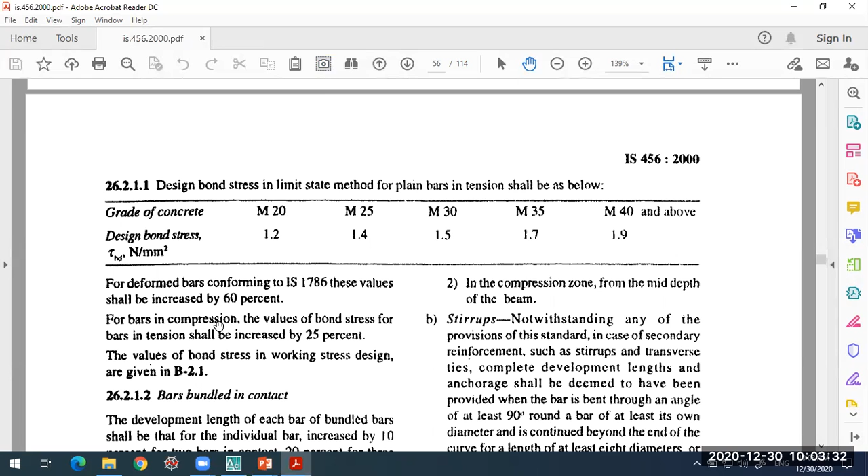Okay, if all the bars are in compression, you can increase this bond stress by 25% in addition. So 60% for deformed bars and another 25% if the bars are in compression. So that is how you are going to obtain the development length.

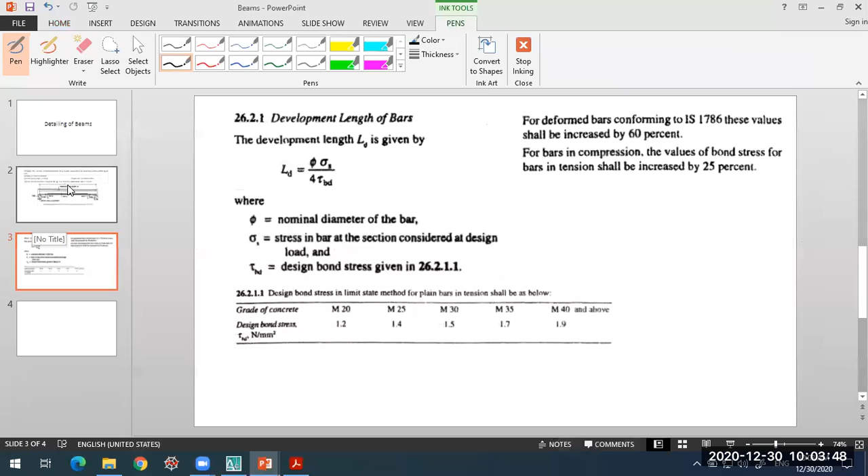So in our case, what is given here for our problem? We'll look at this problem. The span is 5 meter, and the size of the beam is told to us. Width of support, we'll take it equal to the width of the beam, that is 230 mm. So the center to center distance between the supports comes out to be 5 meter plus 0.23 by 2 plus 0.23 by 2, half the width of the support on either side. So totally the center to center distance comes out to be 5.23 meters.

So this is what I can write here, the data we are having. If I take this problem, first is the given data. Clear span is 5 meters. Center to center distance between the supports will come out to be 0.23 by 2, half the width of the support on the left side, plus the clear span, plus half the width of the support on the right side. So this is the L value we have, 5.23 meters.

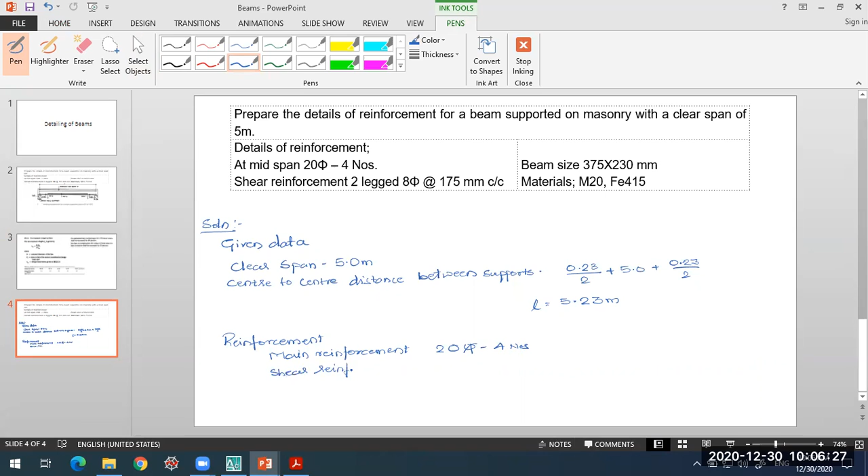And what else is there? The main reinforcement, that is the reinforcement at the bottom. So main reinforcement, we have it as 20 mm diameter bars, 4 numbers. Then shear reinforcement, they are two-legged stirrups, two-legged vertical stirrups.

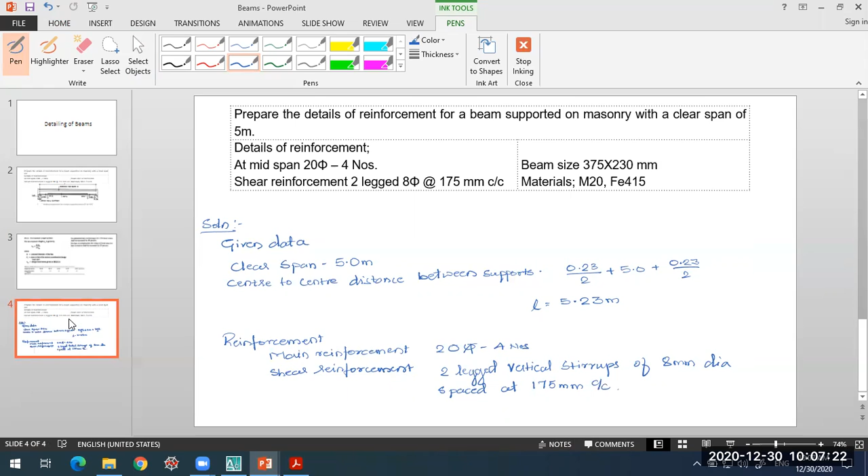So I have two-legged vertical stirrups of 8 mm diameter spaced at 175 mm center to center. So this is the shear reinforcement. These are the details of the reinforcement I have. Now, in addition to this, for preparing the drawing which shows the details of reinforcement, the size of the beam is given.

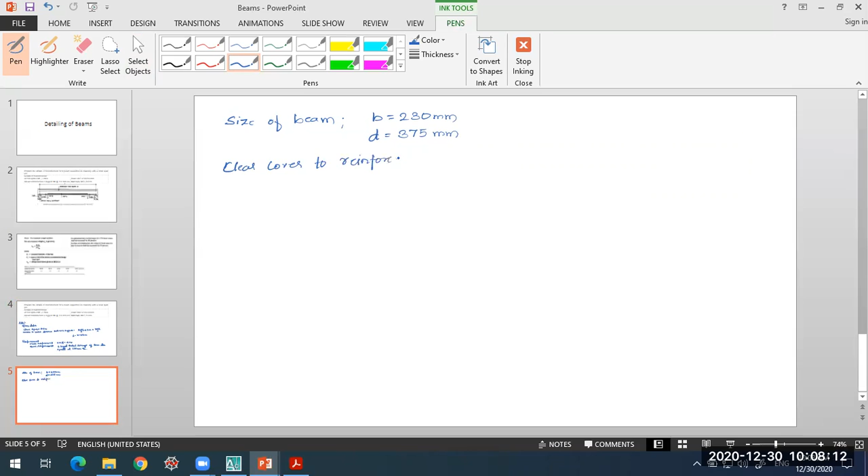So in this case, the width of the beam is 230 mm and the overall depth is 375 mm. Width of the support, we have taken it equal to the width of the beam, even if it is not given. Next, we'll take the clear cover to any reinforcement to be 25 mm. In case of beams, we'll adopt it as 25 mm. It depends on the type of exposure and also the maximum nominal size of the aggregate. So let us assume it to be 25 mm in this case.

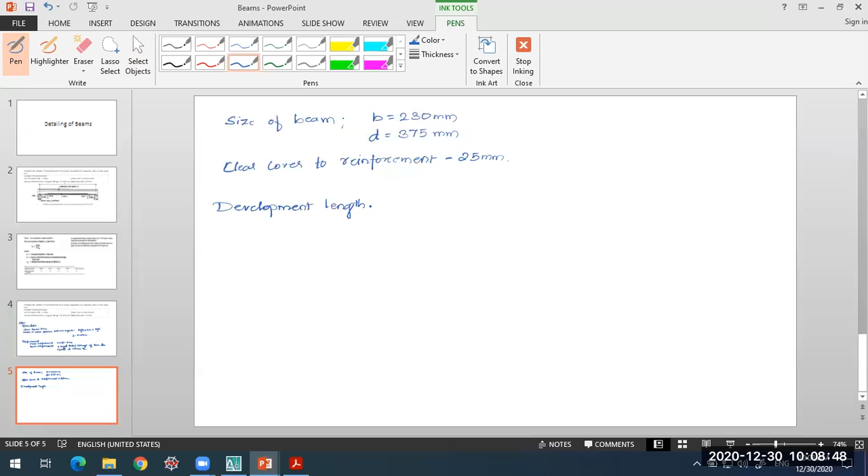And now we need to obtain the development length for our case. So here I'll calculate the development length in tension. The equation is Ld equals phi into sigma s divided by 4 times tau bd. This I have taken from IS 456:2000, page 42. Here in this equation, phi is the diameter of the bar. I'll not substitute any diameter; we'll express it in terms of bar diameter.

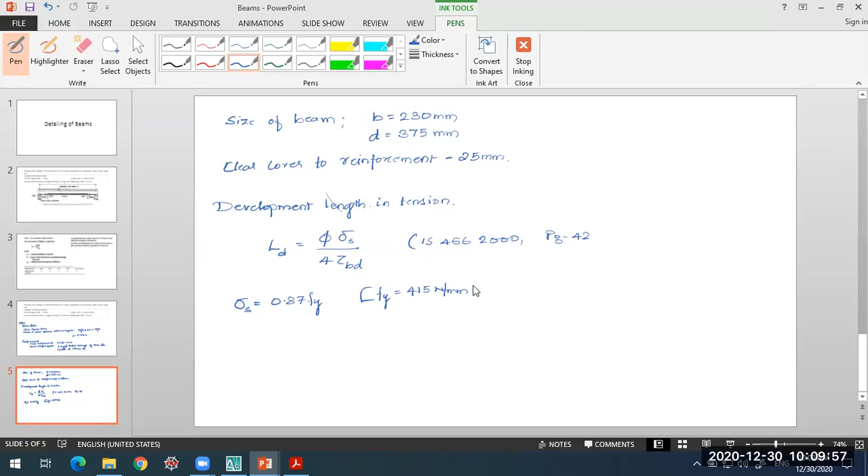The value I require next is sigma s. It is 0.87 times fy. In our case, grade of steel is Fe415, that is yield stress is 415 Newton per mm square. This was given to us. So sigma s is 0.87 fy, which is the design stress in the steel, and tau bd I'll take from the IS 456 table itself. For M20 grade of concrete, it is 1.2 Newton per mm square.

And since in our case the bars are deformed bars, I can increase this by 60%. So this will be 1.6 times. 1.2 Newton per mm square is the actual value. If you increase it by 60%, it will be 1.92 Newton per mm square.

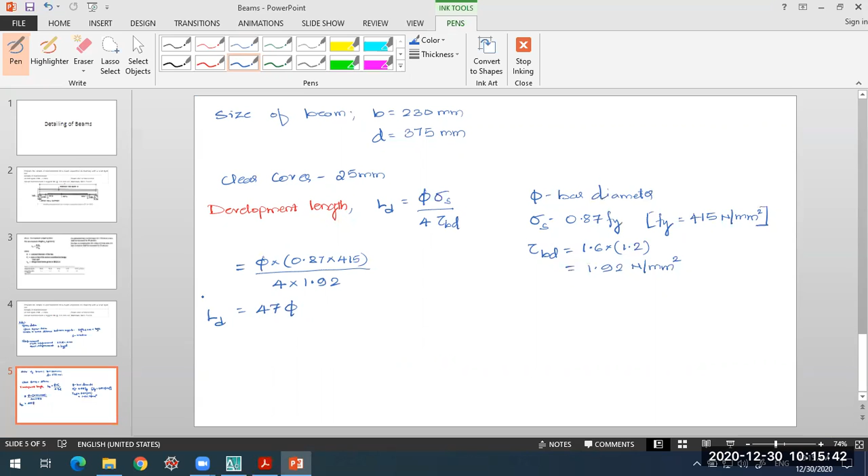Now, if I substitute these in the equation for Ld, I'll get the development length. The bar diameter we'll keep as it is, into 0.87 into 415, that is sigma s, divided by 4 into 1.92, that is tau bd. So this gives us 47 times the diameter of the bar. So Ld is 47 times the bar diameter. This is the development length for any bar in tension.

If you want the development length for bars in compression, this can be further increased by 25%. But at present, this is enough for us. So this information will be provided in the drawing, and at the site they should execute it so that this Ld is provided.

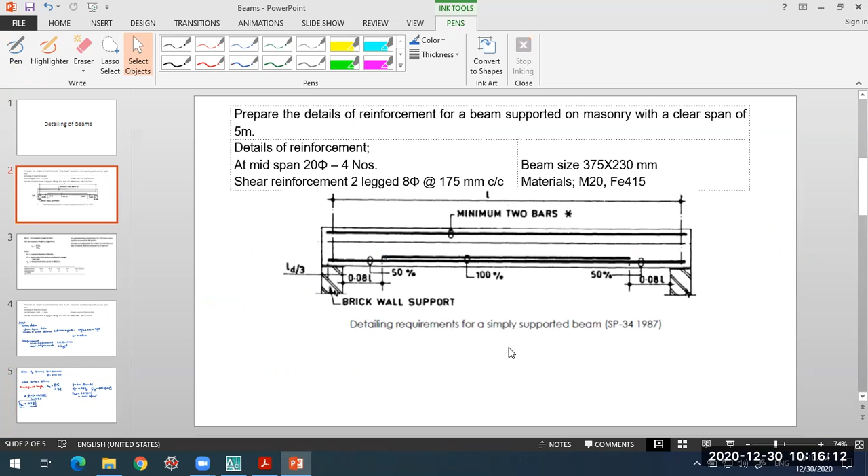Like in this case, the bars have to extend to a distance of LD by 3 into the support. Okay, so that can be achieved by knowing what will be the LD in terms of bar diameter. Now coming to our actual detailing part. So we'll begin with the detailing over here.

So before we go to the AutoCAD and start drafting it over there, let us put a sketch for this one. In our case, for our beam, how it would be. So first is this longitudinal section. So this is the beam. Okay, so this is what I have, and supports, they are the masonry wall. So the supports at the two ends, these are masonry walls of thickness or a width 230 mm. So this is the masonry wall.

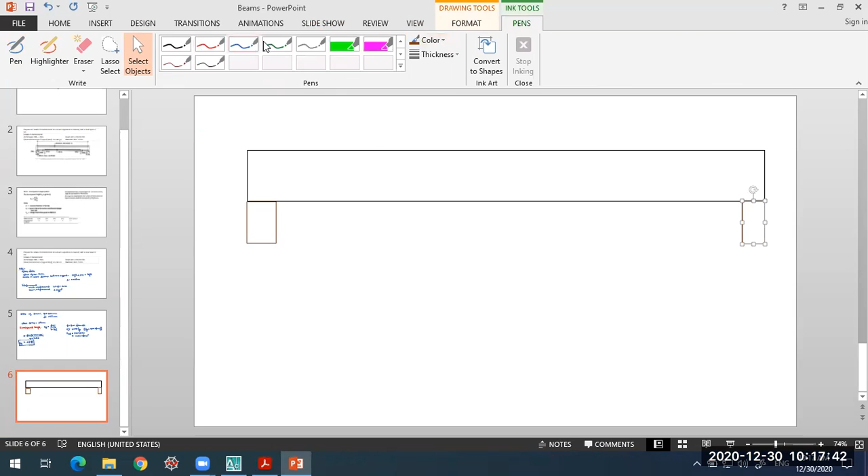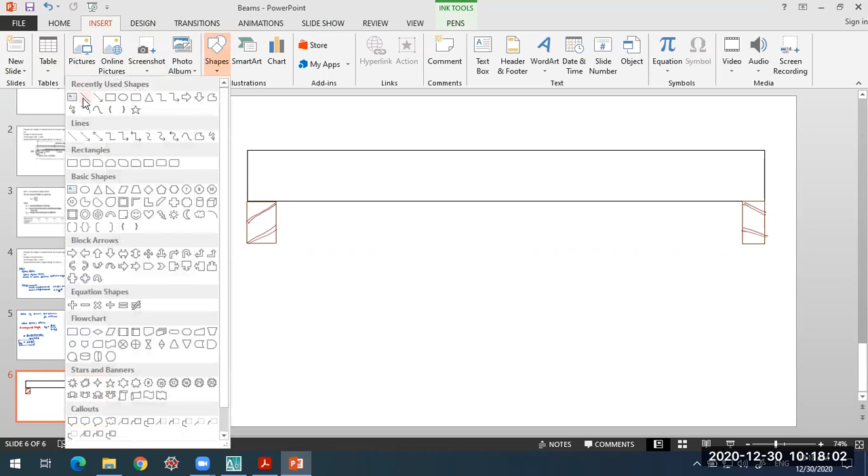Okay, so then after this, what I have is, so these are hatched. This is also the masonry wall on the other side, and from here to here, this will be the clear span. That is from face of one wall to the face of other wall. That will be our clear span. So this clear span, what we have is 5 meters. So this is 5 meter.

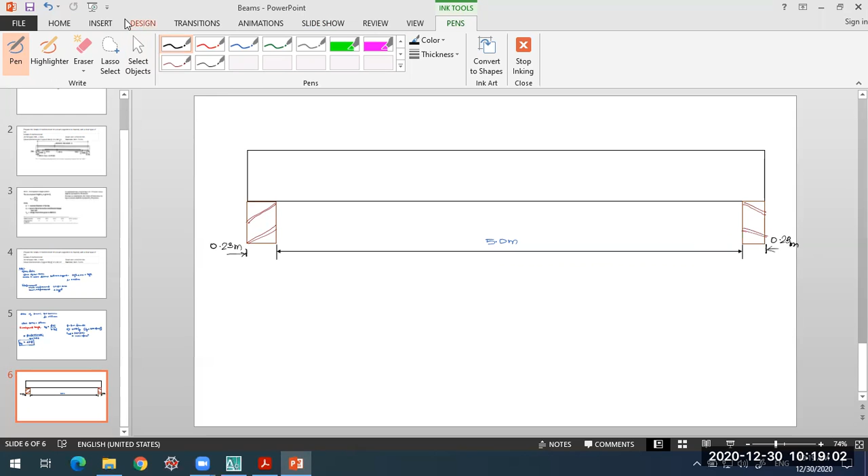Okay, and width of this wall. So this is 230 mm. So on both sides, the width of the wall. This will be the sketch what you need to prepare before you work into the AutoCAD. And then the beam, what we have within this beam is the reinforcement. So this is the bottom reinforcement, what I have with the clear cover over here. And the top reinforcement. So this is our top reinforcement.

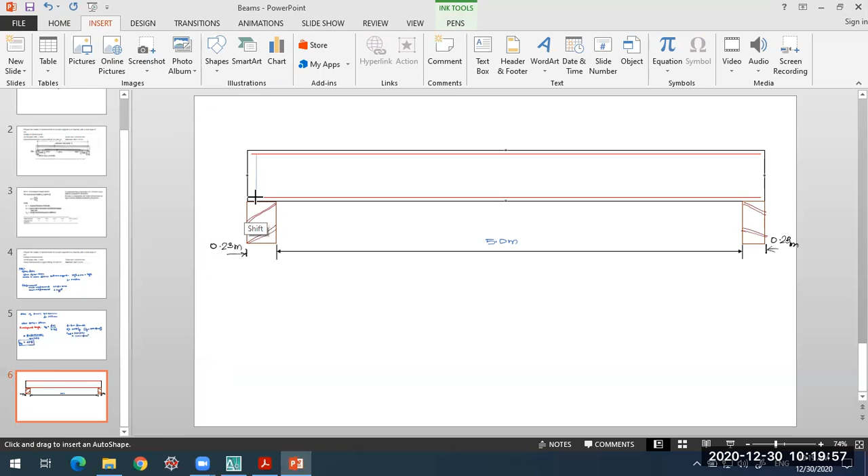Top reinforcement in the sense we have hanger bars, because nothing has been told about the compression reinforcement at the top. So now top reinforcement will serve the purpose of hanger bars. Actually, they are required for holding stirrups in vertical position. So that is the top reinforcement, and from here the shear reinforcement will start. So these are our shear reinforcement. Okay, so this shear reinforcement will be spaced at 175 mm center to center. They are two-legged vertical stirrups spaced at 175 mm center to center, like this.

So from one support till the next support, this will continue. Okay, so this is the shear reinforcement what I'm showing now. As a beginning part, first is you need to prepare this, that is the details of reinforcement, you need to show it. Then you can go for executing the same with the AutoCAD. So these are the shear reinforcement. Okay.

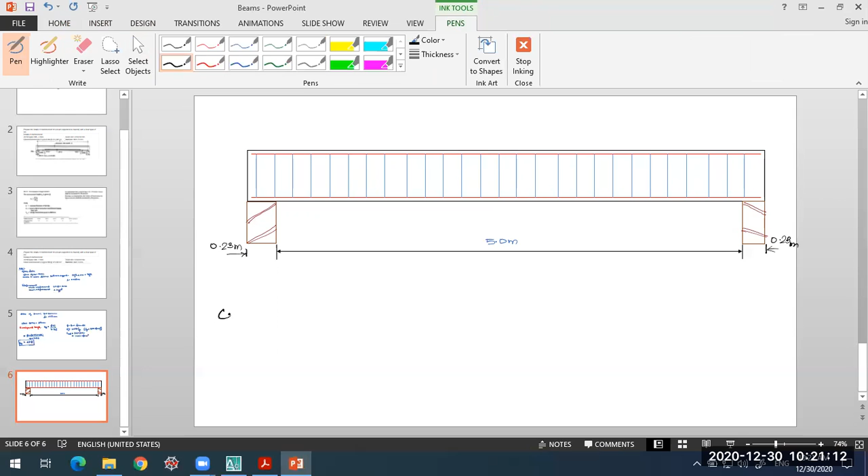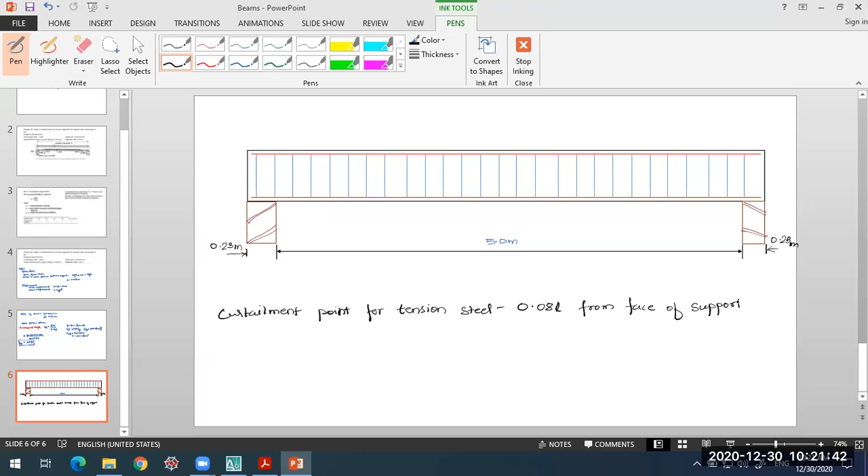And now one more thing what I need here is the curtailment. Where are we going to do the curtailment? So curtailment length or the region in which bars can be curtailed has to be calculated here. So what I have, curtailment point. So this is 0.08 times L from face of support. So this comes as 0.08 into 5230. Okay, 5.23 meter is the center to center distance over here. So in terms of mm, that comes out to be 5230. So it will be 418. Okay, so this is 418 mm from the face of the support.

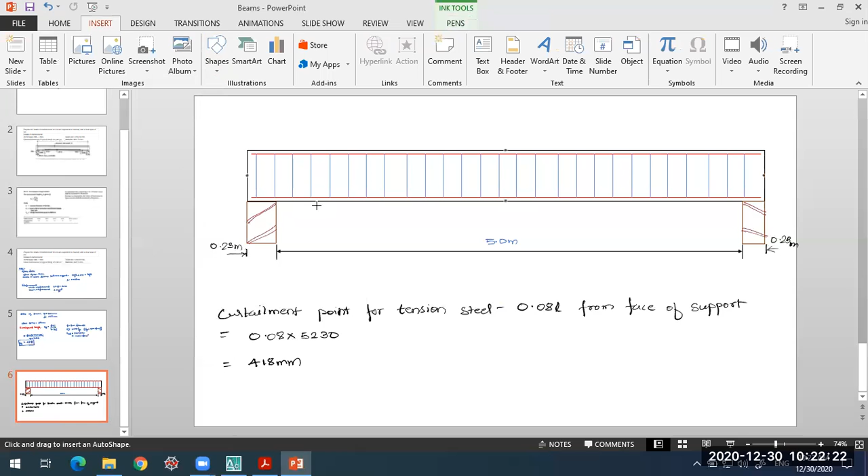Anywhere within this distance, we can go for curtailing the bars over here. So I'll show that point over here. So this is the length within which you can go for curtailing the bars. Okay, and you cannot curtail before this distance on either sides. When you come towards both the supports, these are the curtailment points over here, which are 418, or you can round it off suitably. It is coming out to be 418, so I'll show it as 400 mm. Okay, so well within this distance I am going for curtailing.

It is better you always follow units in mm when you are working with AutoCAD. Okay, here some units are given in meter, but in AutoCAD we'll be following only the mm. Okay, so this is the point. So beyond this, the bars have been curtailed. It is shown by such a kink in the bar like this. It indicates that curtailment has been done over here. Now the next thing is about detailing these reinforcement.

So first is here at the mid span, what I have is 20 mm diameter bars which are 4 in number. Okay, and on the top what I have is these are hanger bars. So 10 dia; if not given, normally it will be specified what are the hanger bars. They are 10 mm in diameter and 2 in numbers. So these are the top hanger bars.

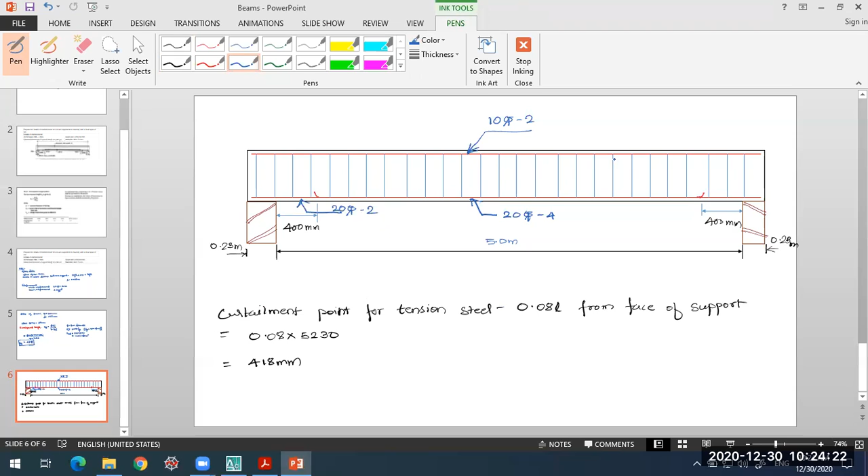Now once I come towards this support, here the curtailment is done. So I can curtail at the max 2 bars. So what are available here, 20 dia, 2 numbers are available. Okay, so that is what we can do. You cannot curtail more than 50%. So of 4 bars, half have been curtailed, 50%. These are 2-legged 8 mm dia at 175 mm center to center.

These are the shear reinforcement. Okay, and after this you need to provide the details of the section, details in the cross section. So two cross sections we'll choose here. One is at the midspan, one is near the support. These are the cross sections required to represent the details of reinforcement. Because curtailment is done here, the bars are going to change. That's why I'm taking two sections, one at midspan, one at the support here.

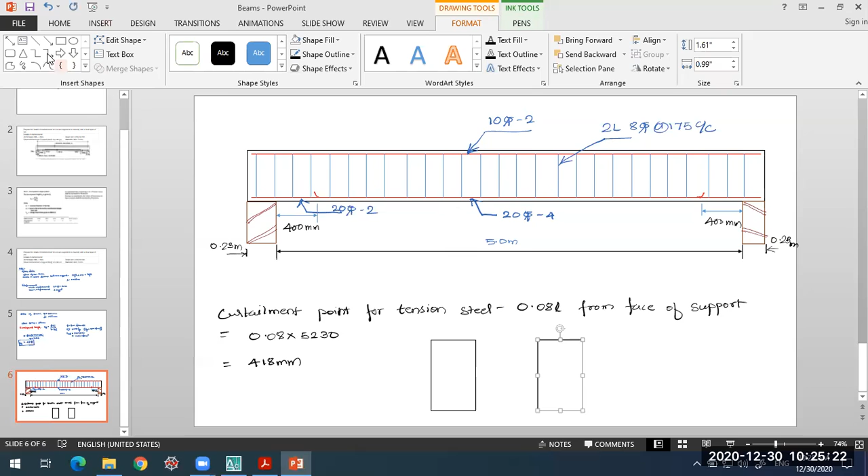Okay, so what happens here in cross section? This is the cross section at the midspan, that is at section 1-1. So this will be our section 1-1, before curtailment or at the midspan. And after curtailment I'll take one more cross section over here. This is section 2-2. Okay, so we'll show the details of reinforcement at these two cross sections.

So here is what I have. This will be the stirrup within this. This sketch has to be prepared manually by you. Okay, so the stirrup. Same will be the stirrup over here. These are the shear reinforcement. This is how they will appear in the cross section. And here somewhere you'll find these hooks which will be coming.

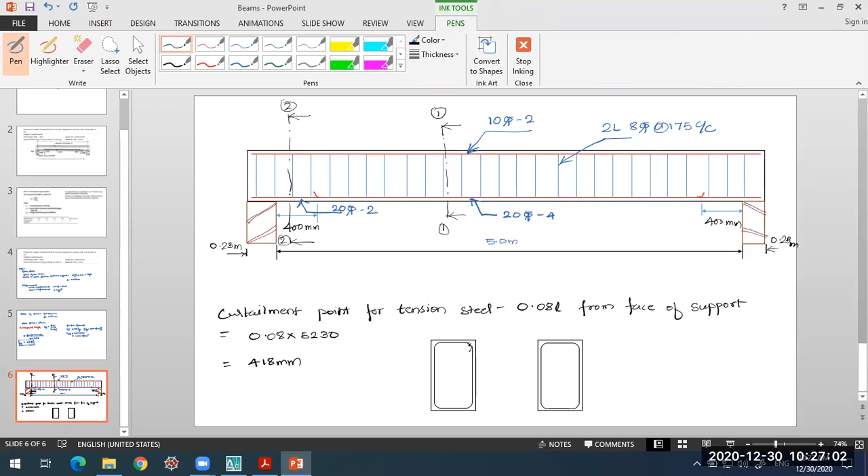Okay, so at section 1-1, the width is 230 and depth is 375. For this also it is 230 and 375 depth. Okay, so now about the bars. At the bottom there are 4 bars, 1, 2, 3 and 4. These are the bottom bars at section 1-1. On top side you have 2 hanger bars at the 2 corners. Here 2 hanger bars at the 2 corners will be there, but on the bottom side the 2 bars in the middle have been curtailed.

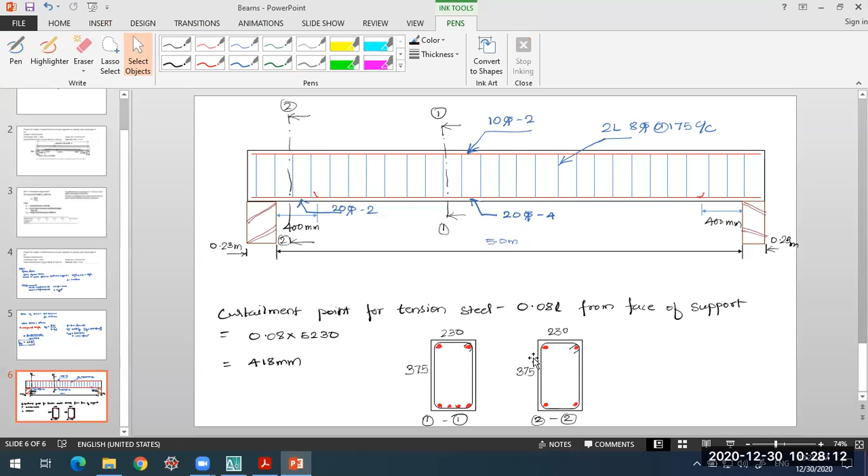So these are the cross sections at midspan and near the support. This is my section 2-2 cross section. So once you do this, here also detailing is required. You need to provide as many details as possible in the drawings. Drawings will be referred to at your site. We don't give any design calculation at the construction site, so drawings are very important from that point of view.

So here, the details you need to prepare: bottom reinforcement, 20 dia, 4 numbers; top reinforcement, 10 dia, 2 numbers; and these are the stirrups. I'll put it on the other side. So 2-legged vertical stirrups, 8 dia at 175 c/c, center to center. Okay, so let us say this is 375. These are the sizes of the beam.

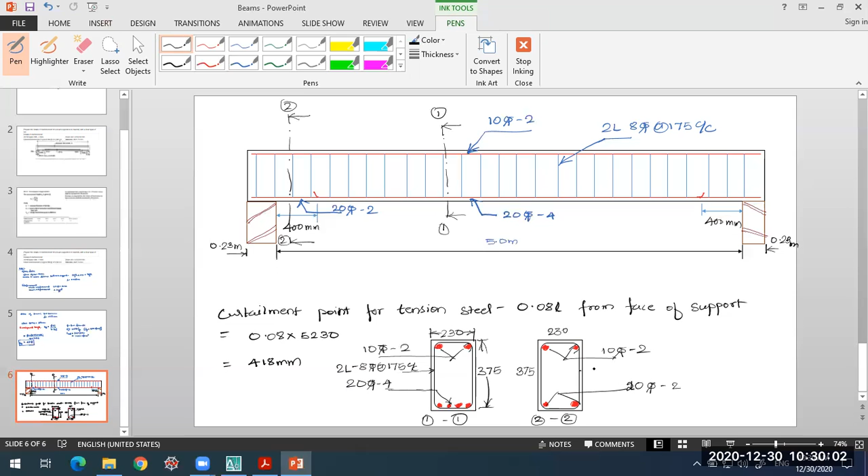Here what you have, 10 dia, 2 numbers. The diameter of the bar, 2 numbers. Sometimes they just put it as Y10 also, that also refers to 10 dia, 2 numbers. So here it is 20 dia and 2 numbers, and these are again 2-legged 8 dia at 175 center to center. Okay, so these are the cross-sectional details you have.

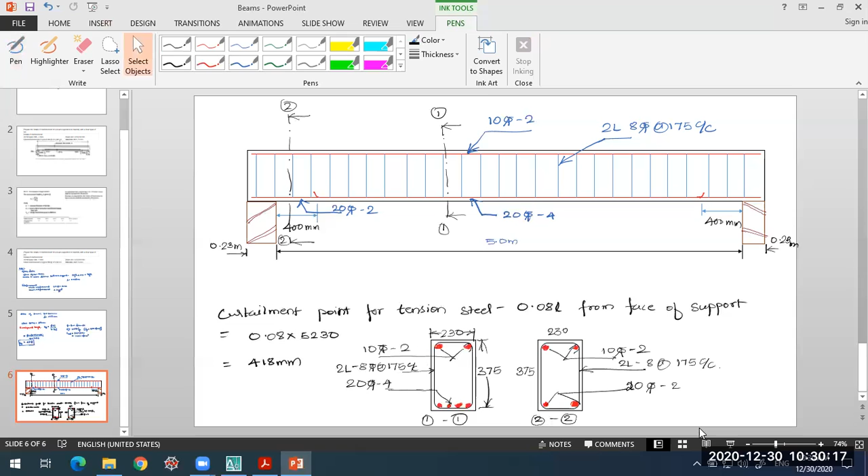So this has to be prepared in AutoCAD. So we'll go with AutoCAD here. Metric units, so we'll be using that one. And remember, all the dimensions we are preparing are in mm. Right. So starting with the longitudinal section. For the longitudinal section, I require a rectangle here.

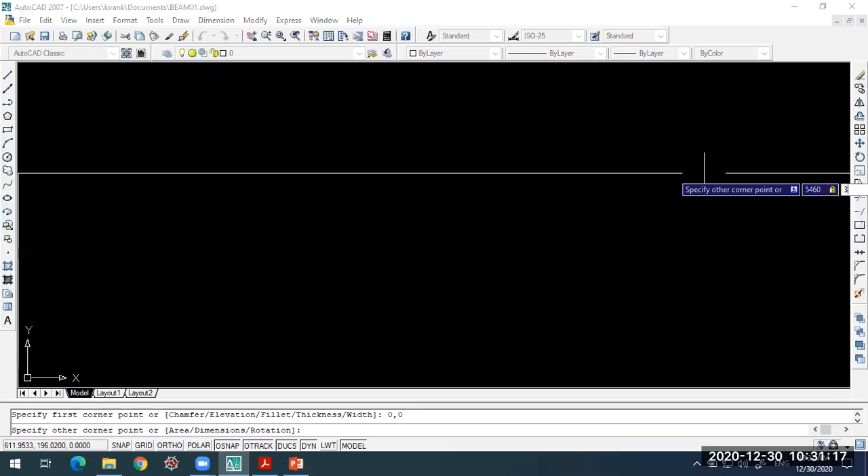The first corner I'll take to be 0,0 at the origin. The next corner: X will be 5000 plus 2 into 230, so that will be 5460. The overall length of the beam is 5460, and height will be its depth, 375 mm. Okay, so this is my longitudinal section of the beam.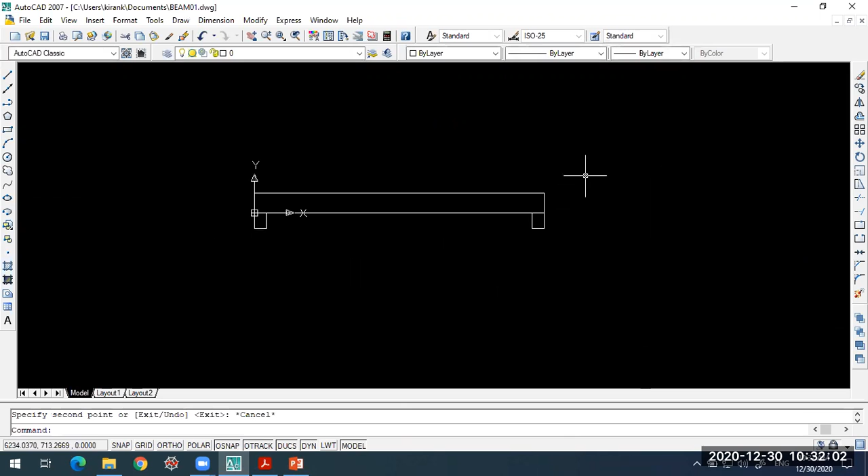Okay, now we'll also show the supports which are there. So here, this is the support. I have 230 as the width, and say some 300 mm depth, just to represent that wall. Okay, so this is the left support, and also we have this as the right support. So this becomes my longitudinal section of the beam. I'll place it somewhere here so that it will be visible.

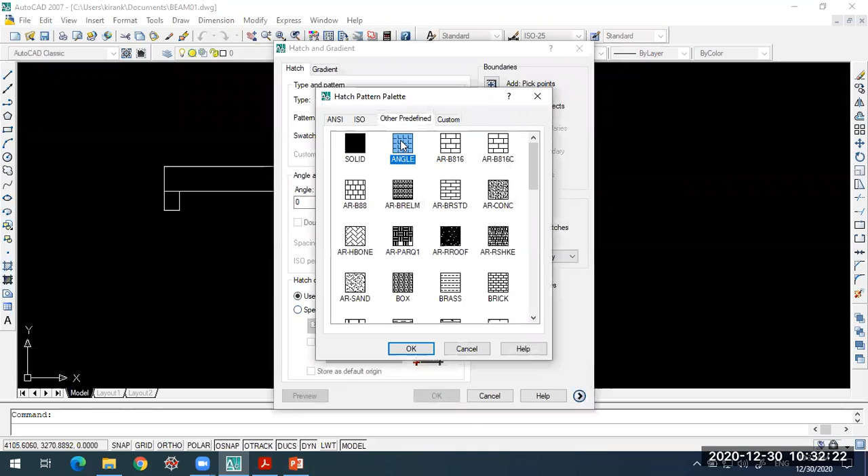Right. So now I need to hatch these supports. To represent the wall, this is what we will be choosing here. Pick points within this and also within this. Scale as 50, plus 25. Yes, this is fine. So this will be our wall.

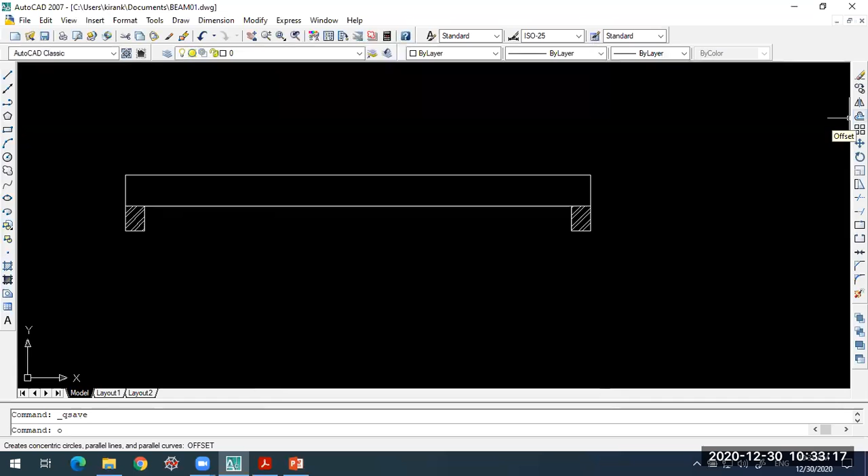Okay. Now what I have is I need to show the reinforcement. I'll simply offset this rectangle inside. Okay, so offset command, you can choose it. You can get it from the quick access menu, or you can just type O. Okay, command O. It will give you offset, and it is asking to specify offset distance. So clear cover will be my offset distance, 25, and I want this object to be offset within this.

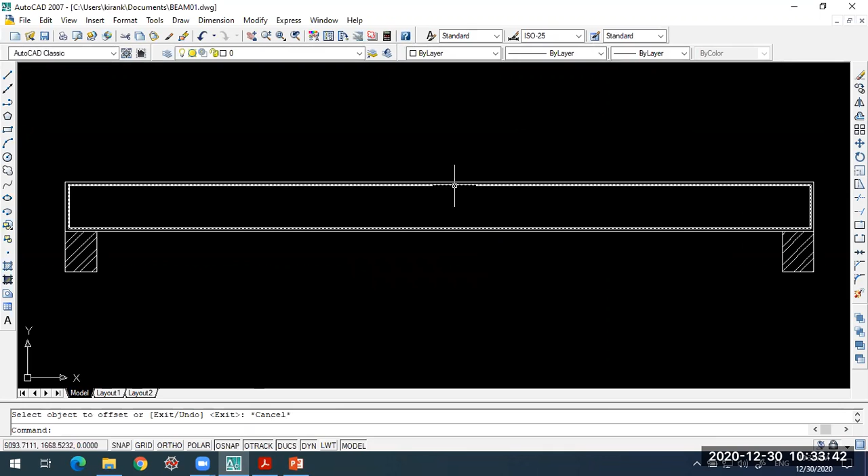Okay, fine. So here it is a rectangle. Now let's just explode this one. So I'll get line segments here. So now we have the line segments. So my reinforcement is ready now. Okay, both reinforcements are appearing here. Okay, I just have to arrange them now.

So what we prefer is normally the reinforcement line weight will be more as compared to other edges of the concrete. So for this, I'll increase the line weight slightly. I'll make it 0.25. Let us keep it 0.25 compared to the other edges or lines. Okay, so line weight. Now you can see it is appearing thicker than the other lines. So you can adjust them accordingly.

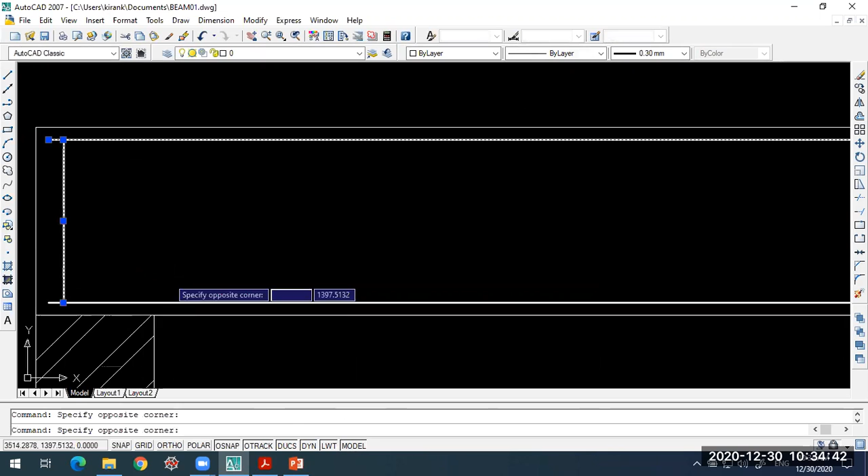Don't go for keeping too much line weight. It will not appear properly in the print. 0.25 should be okay. Now I have top reinforcement and bottom reinforcement. Also, there is one line which is showing the stirrup. Okay. Now we'll increase these numbers. So I have one row and column, since they are spaced at 175 mm center to center, and overall length of the beam is 5460. Okay, so 5460 divided by 175, it comes out as 31.2. Let me give it as 32 columns here.

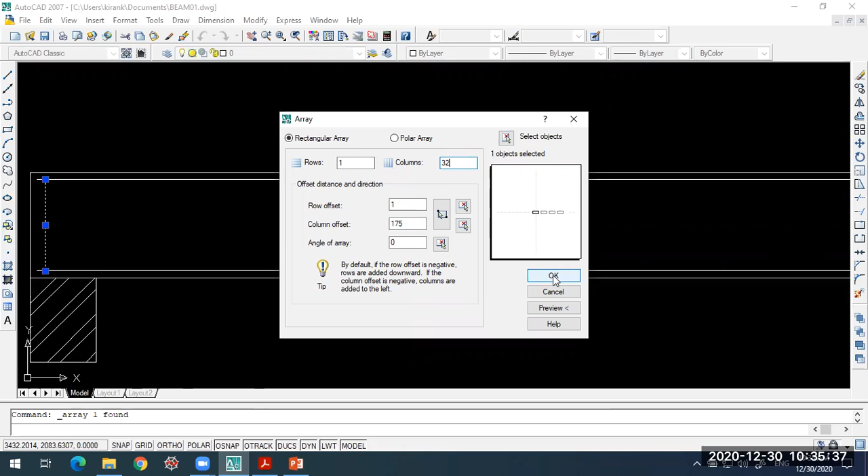Okay, so row offset and column offset. Right, column offset is 175. Number of rows 1 and columns 32. Okay, so row offset we don't require. There is no second row coming here. So what I have now, this is my shear reinforcement. Okay, so just move it inside the beam. Right. So everything is ready.

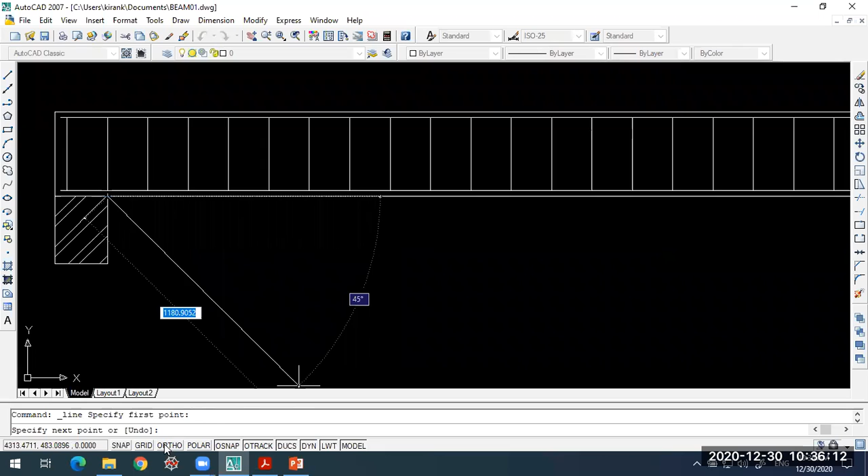Now only thing is you need to do the detailing. So for detailing, first we'll go for a dimension. Before that, what I require is one more point, the curtailment point. So we have taken 400 as our curtailment point from the face of the support. So this is my face of support. From here, let me turn on ortho, I'll take a distance of 400 mm. Okay, so up to this point, this is the curtailment point. Same is required on the other side of support. I just copy this with this end as my base point and paste it at this corner. Okay, so this is our curtailment point.

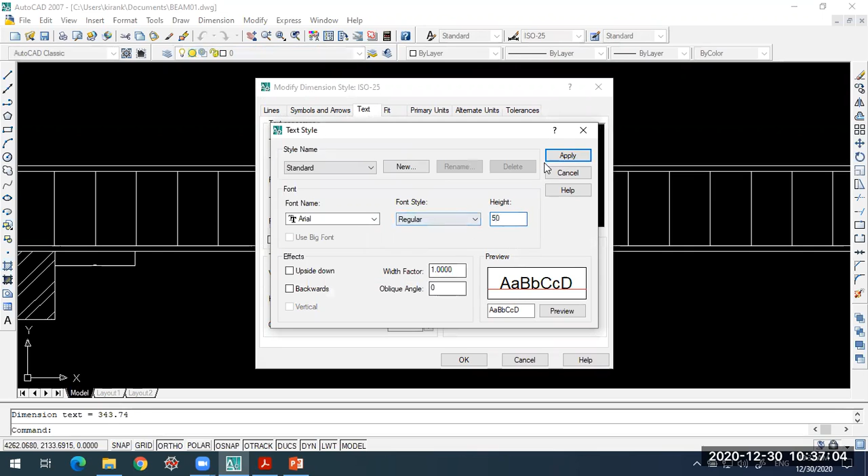Okay, now we'll go with the dimensioning. Okay, linear, right? So let me just format this dimension style. This will modify the text. Let it be standard text or Arial. Height we'll make it 50, and set current. Now okay, this is fine, this much height.

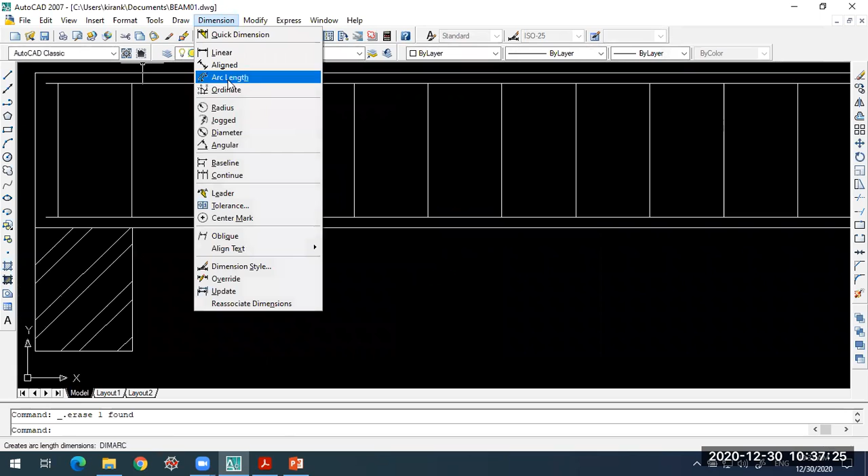So dimension, linear dimension. One is the clear span, right? So clear span is 5000 mm. Again, spacebar, repeat the dimension command, and support width we have as 230 because it is coming 230. Okay, and on this side also repeat the dimension command by pressing spacebar. Okay, 230. Yes, this is also 230. One more here. So hit the spacebar to repeat this dimension command.

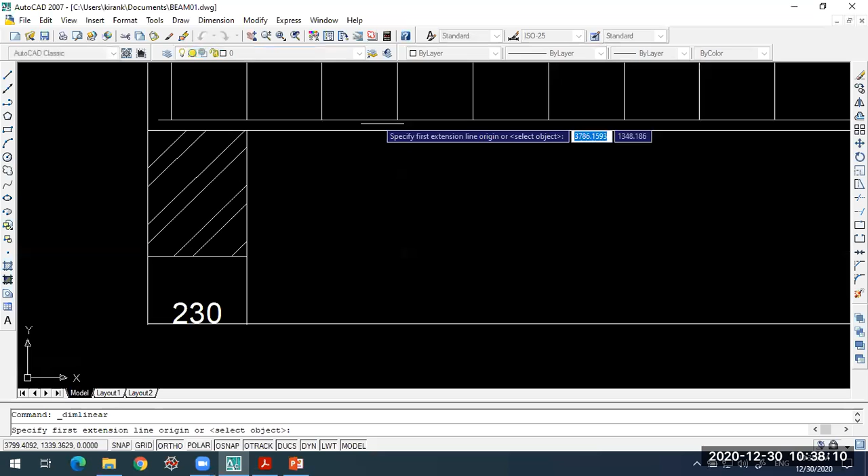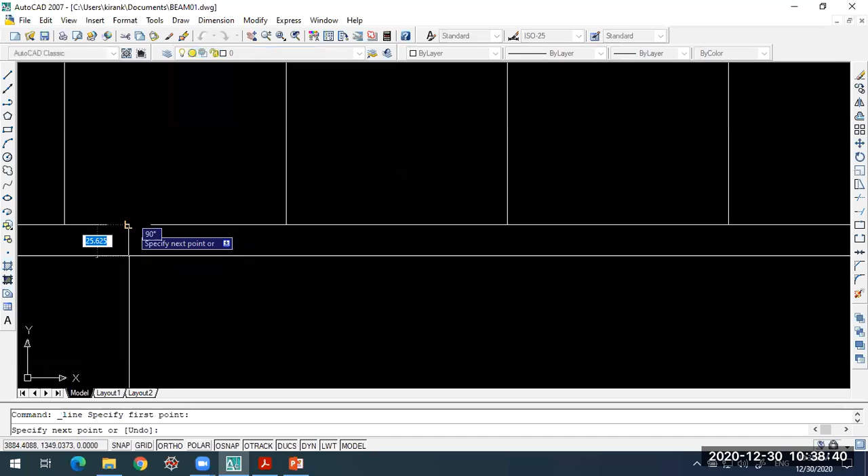And what I require, I need to represent that curtailment has been done over here. So it is done by something like this. Okay, same over here. Just take a line and take this point over here, and this is the curtailment. So you are now able to see in the longitudinal section where actually the curtailment is done, right? So that reinforcement is drawn. Okay, we are finished with the drawing here. Only thing is the cross section is remaining.

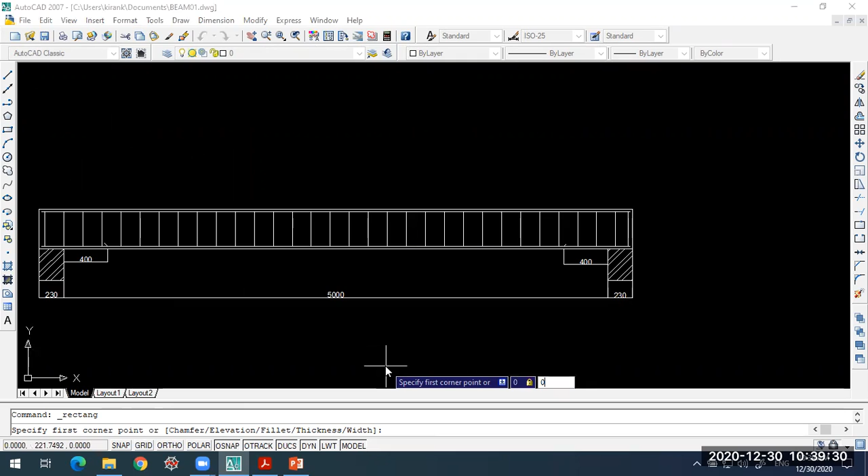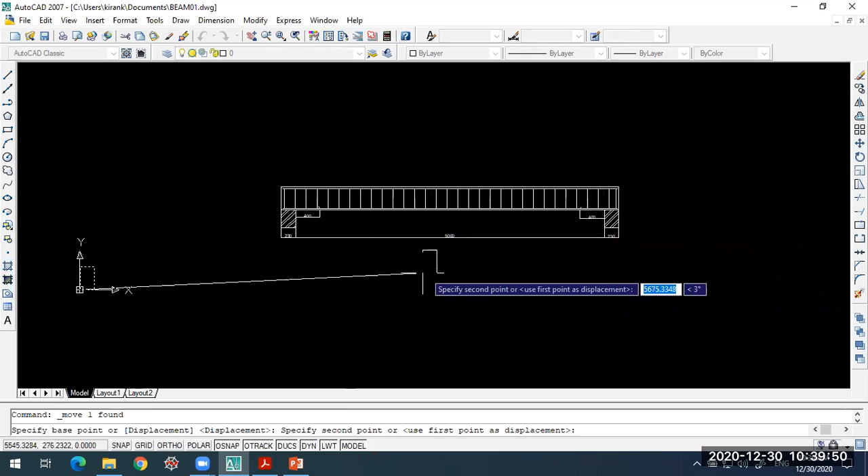Okay, so I'll take this cross section over here. I'll prepare that rectangle. So the beam is rectangular in cross section. So 0,0 first corner, then 230,375. Okay, I'll have that rectangle at this origin. This I will move near my beam. Okay, I'll place it over here. One more, because two are required for us. So just prepare one more by copying this. Okay, that is sufficient. Now what I require here, I need to first show the stirrups.

Okay, again we'll go for offset by pressing O on your keyboard. You'll get the offset command. That is a shortcut for offset. You can even access it here. This is a quick access offset. Again, 25 mm is the clear cover. So with that I'll offset it. Here also I'll take it to draw the shear reinforcement, two-legged vertical stirrups over here.

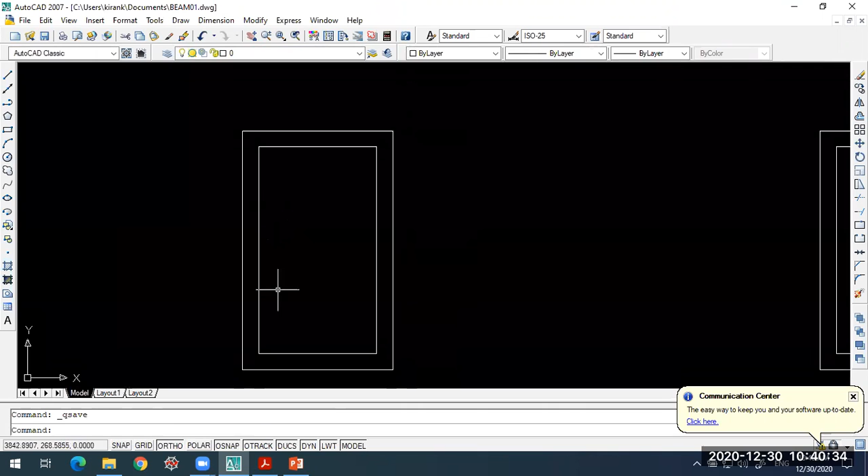Now these corners will not be square. They have to be filleted. Okay, so they'll be rounded. So go for this fillet. Okay, fillet radius some 25. We'll give 25, and here, sorry, fillet radius, okay, 25.

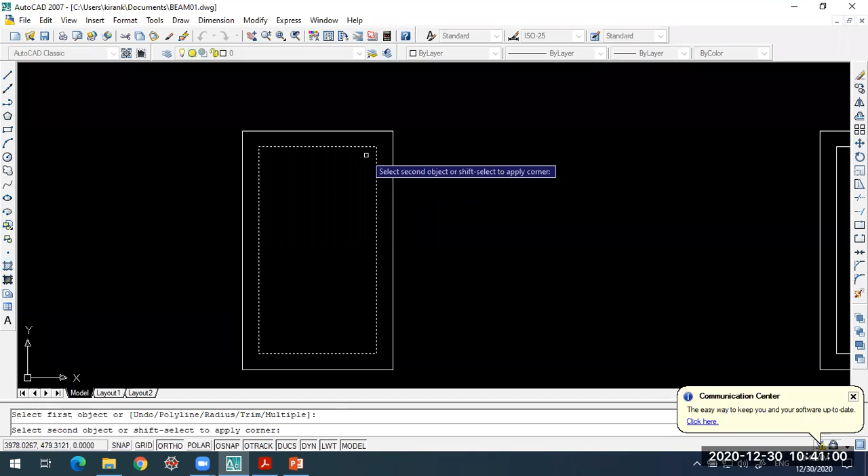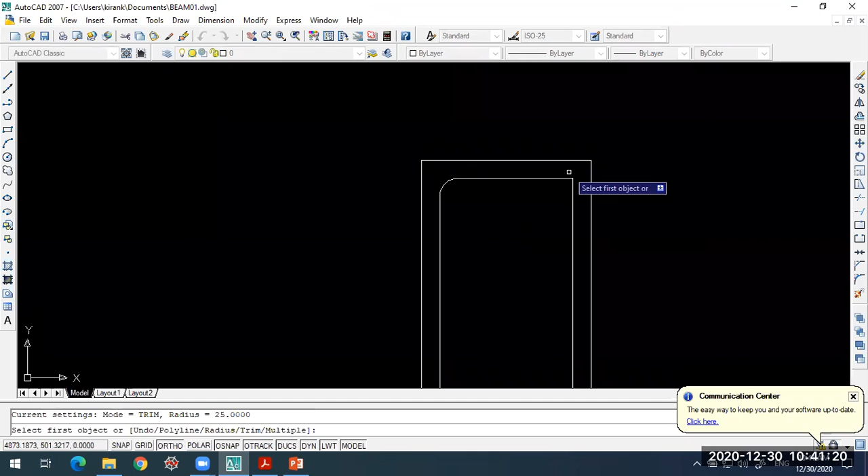So this is the fillet. Again, one more at this corner, fillet. Here also fillet. The radius has to be specified as 25 mm. Same for this one. Choose fillet, specify R 25. Okay.

Once you choose the fillet command, first you can type R, hit enter. It will take the value of radius, give 25 as the fillet radius. Okay. And then we have this as our cross sections. So right now we only have the shear reinforcement what we have drawn here. So one more thing what we need to do is just show these bars. Okay, these are bars tied at the corner over there.

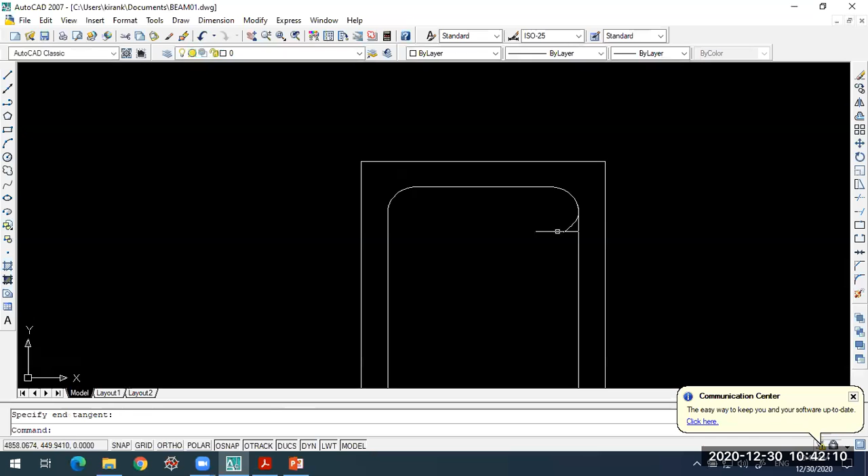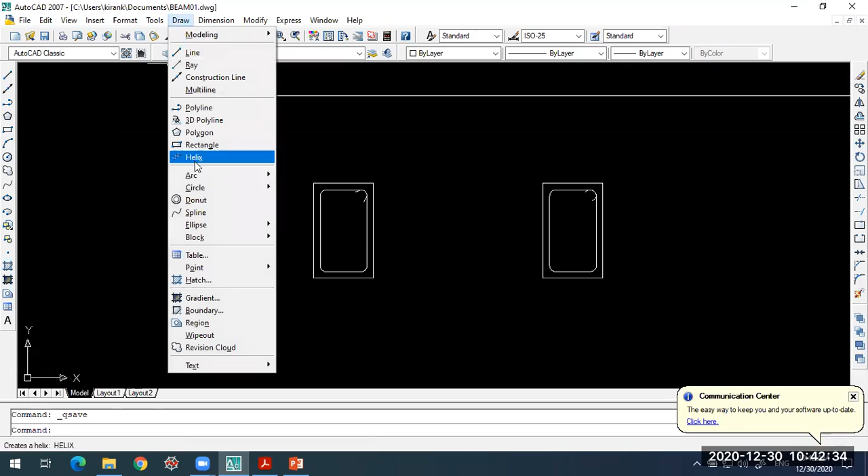Okay, now I need to show the main reinforcement and the hanger bars in cross section. For that, I'll go for taking this donut. Okay, so donut outside diameter you can keep it as 20, inside diameter make it 0. Okay, so this will be the... where it went. Okay, so donut, what it is asking, inside diameter is 0. Okay, I gave it in reverse way, outside diameter is 20.

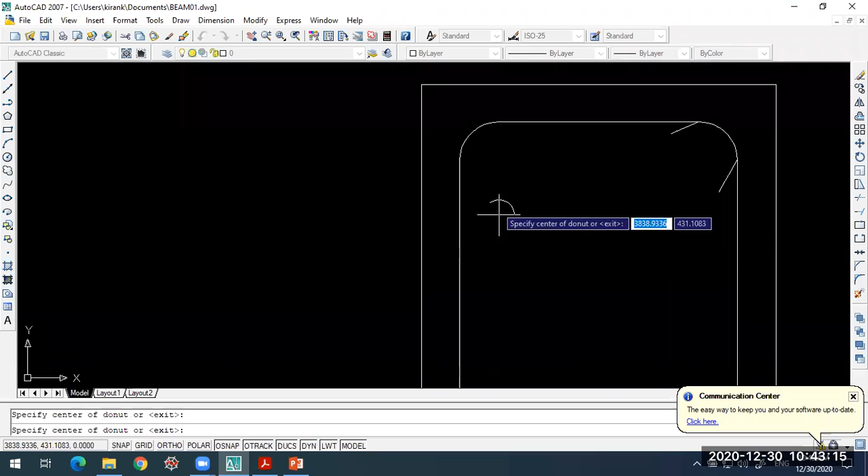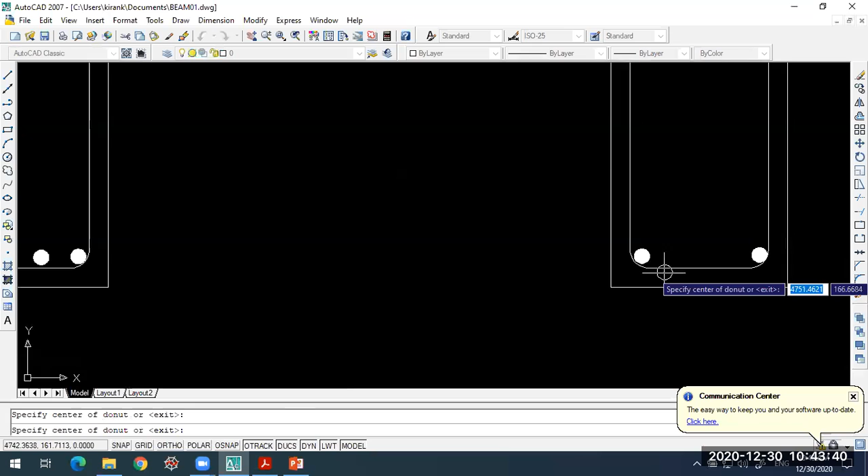So this is the first reinforcing 1, 2, 3, and 4 on the bottom side. On the top side, 1 on this end, other on the other end. Okay, 2 hanger bars. So here also 1. Okay, this is 1 more. On the bottom, since 2 have been curtailed, you are left with only 2 bars here. So these are at the corners here. Okay, so I'll just move them to the bottom, resting on that. Okay, so we are finished with drawing all the sections here.

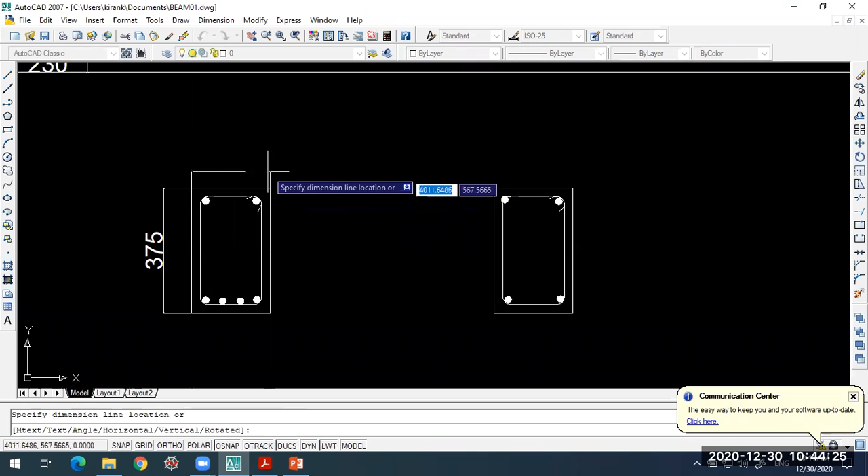And in the cross section also we'll show the dimension for this. So this is the depth of the section. Turn on the snap. Depth of the section 375, and width of the section. Width of the section. Why it is not taking? 230. So width of the section 230, and depth of the section 375.

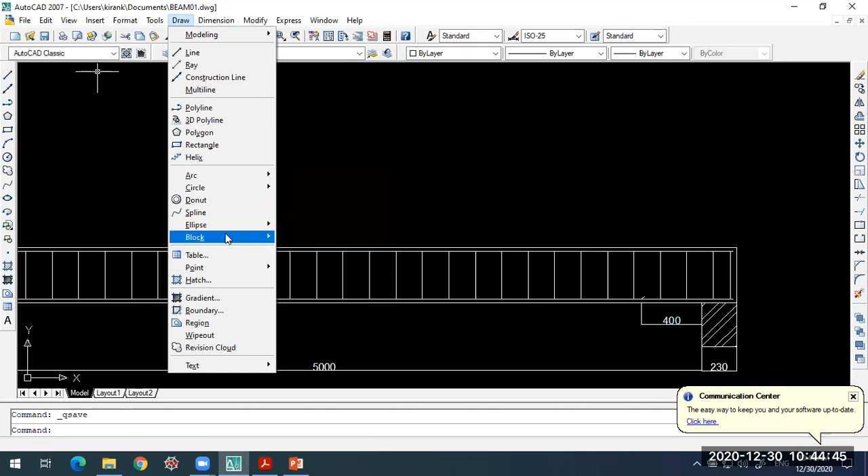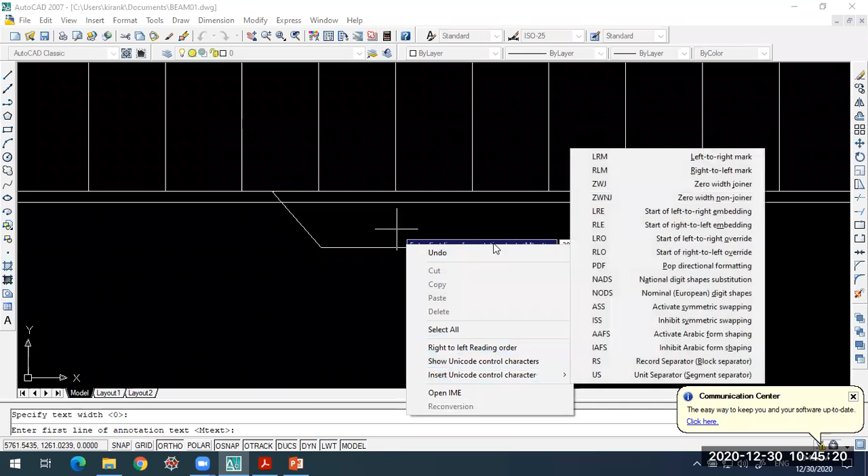Okay, and now comes detailing. Okay, so I require the leader. So in dimension, I should be able to get this leader. Okay, leader, right. So bottom steel at the mid span. So this is my steel at the mid span. What is the text here? 20 mm. Okay, diameter it is 20 mm. So 20 mm, or you can just put it as Y20, and numbers are 4. Okay, 4 bars of 20 mm dia.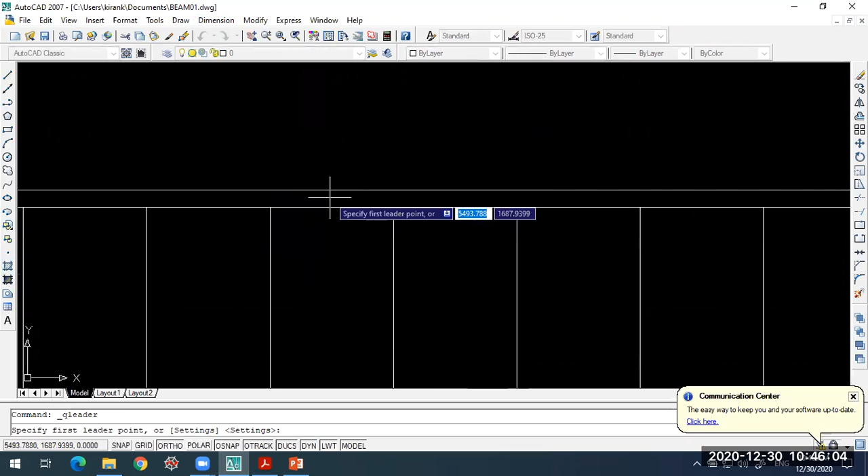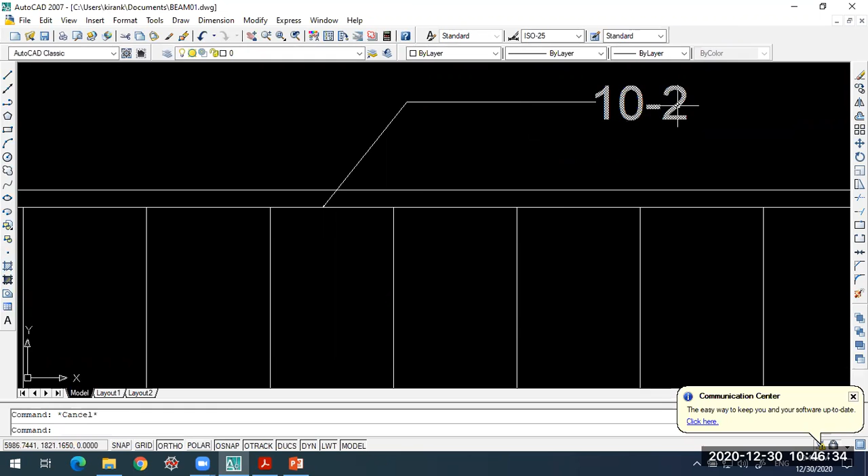Okay, if you want, you will also get this symbol. Double click on this. Instead of this, what you require, symbol, diameter symbol. Okay, it can be put in this form also. Okay, so on the top also again choose this leader here. Okay, and take this one, just this line. Here what I have is 10 dia and they are 2 in number. Okay, so let me put that diameter symbol here. Just double click on this text, you should be able to edit that. The symbol is diameter. Okay, so these are the main bars.

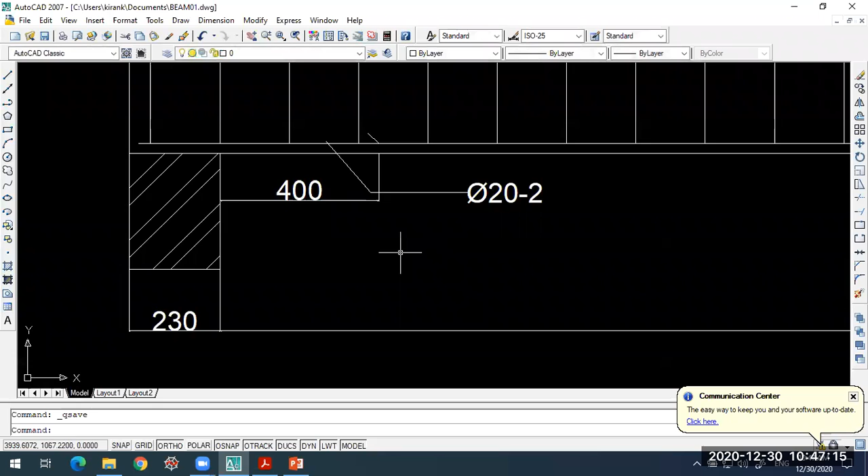Now here, this I'll take it after curtailment, right? So this is the point after the curtailment. Okay, right. Okay, this is point after the curtailment. Here, what is happening? Same 20 mm diameter bars are there, but 2 in numbers. Okay, and one more thing, what is required here? Copy this one.

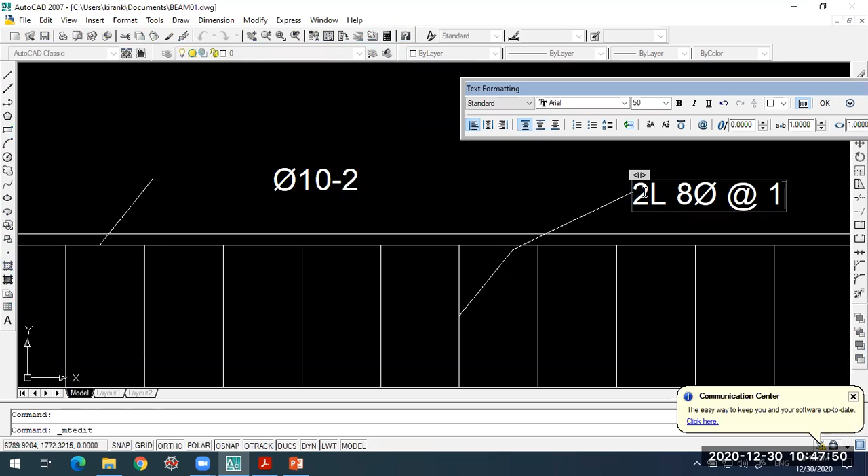So these are 2-legged 8 dia. Okay, 2-legged 8 dia at 175 center to center. These are the shear reinforcements. Okay. Slightly increase this. I'll increase that one. If required, you can change these things. Arrow size 25. Right. So this is the same thing, what I require in the cross section as well.

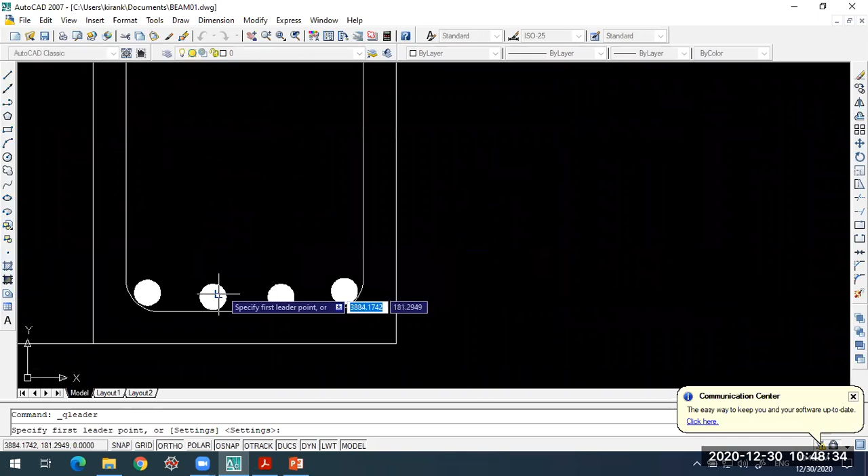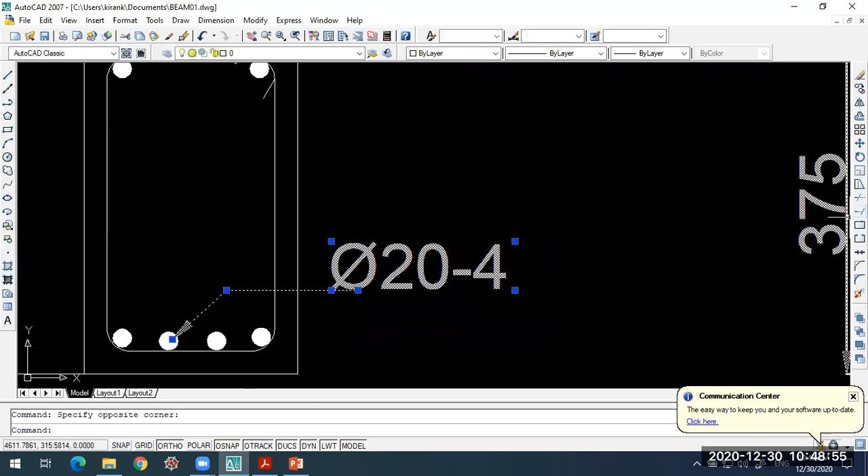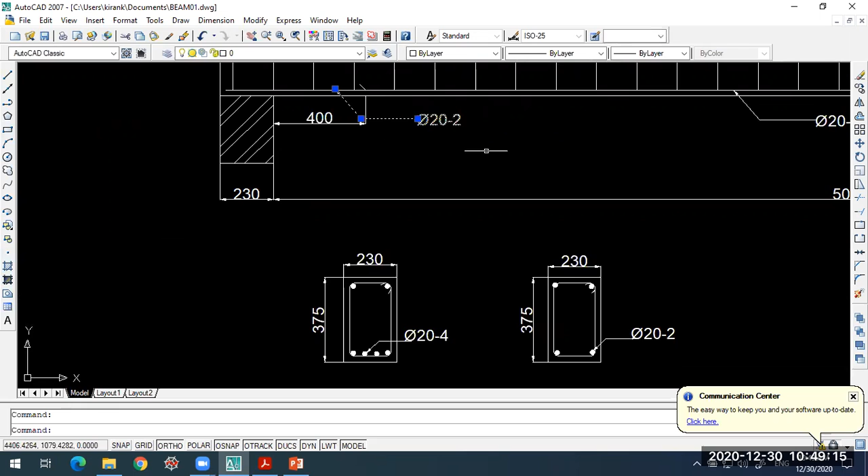So this leader, I'll take it. So bottom reinforcement. Yes. Okay. Same in this section also, but the numbers are 2. Okay. And on the top side, dimension leader. So these 2 bars. What I have is these are 10 mm, 2 in number. So copy this one and same on this side. Okay, so they should be coming inside the stirrup.

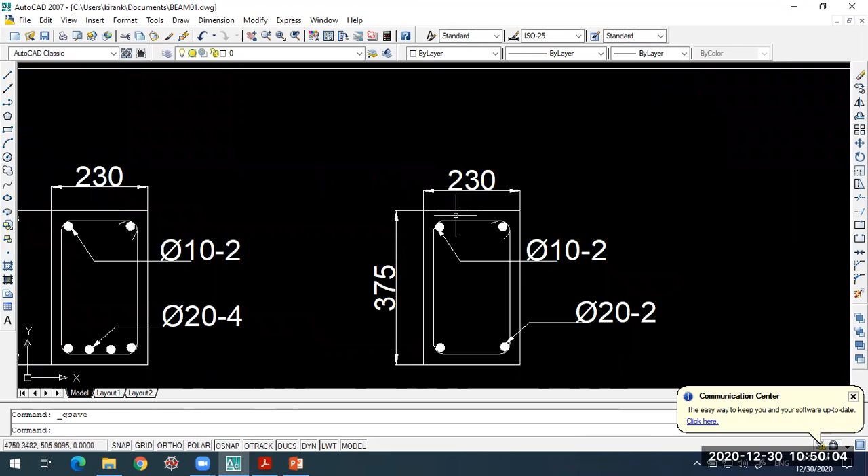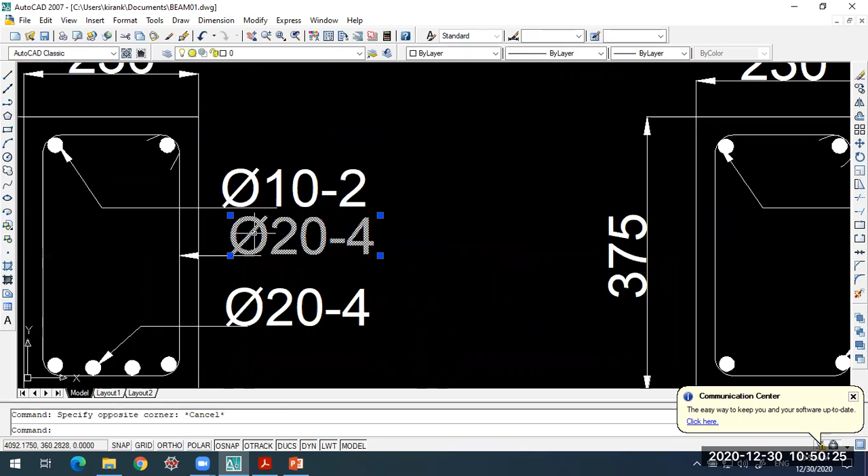Fine. So this is the detailing part. Next, one more is for these stirrups. So this is for the stirrups. What I have for stirrups is here. Just control C and I'll paste it.

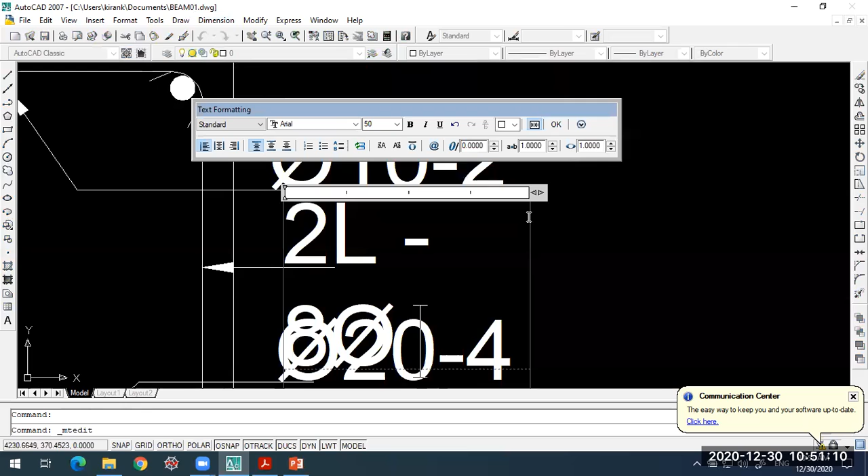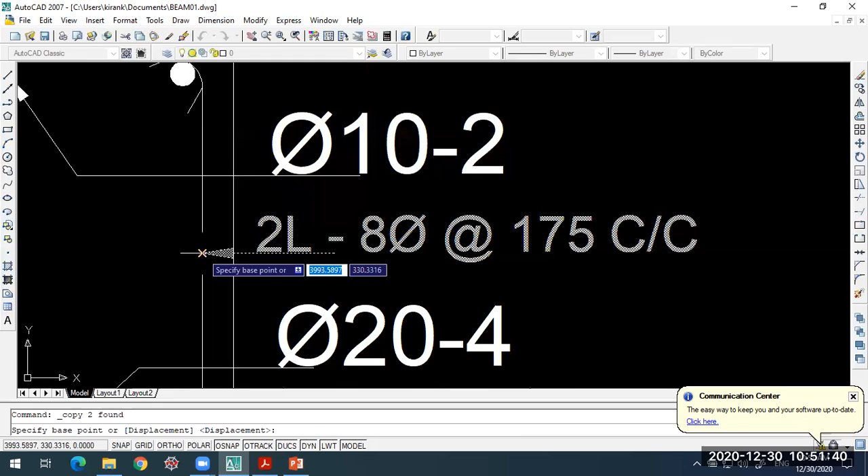So two-legged 8 dia, two-legged 8 mm dia at 175 center to center. Okay, so that will be the reinforcement details. Same on this cross section. Okay, you can also name this cross section here.

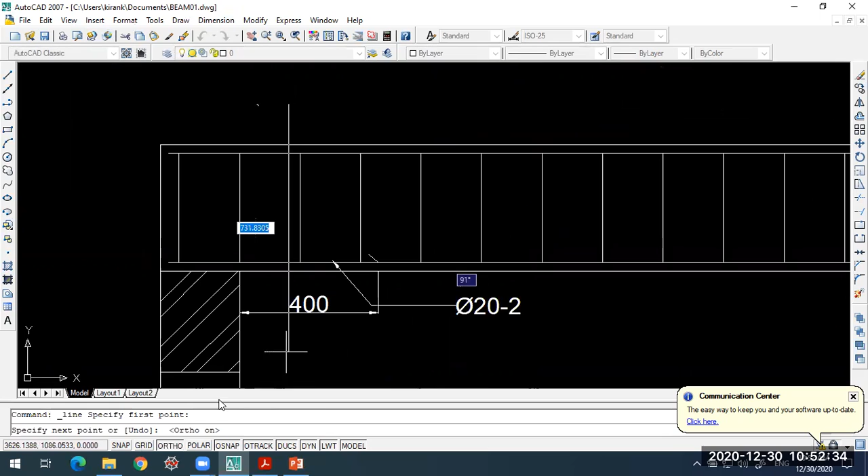This is section 1, okay, and the other one we'll call it as section 2, section 1, then here it is section 2. Okay, whereas these sections 1 and 2 are before and after the curtailment. So just show it over here. This is one section what I have. Okay, so this is one section. Just choose some other line for showing this section.